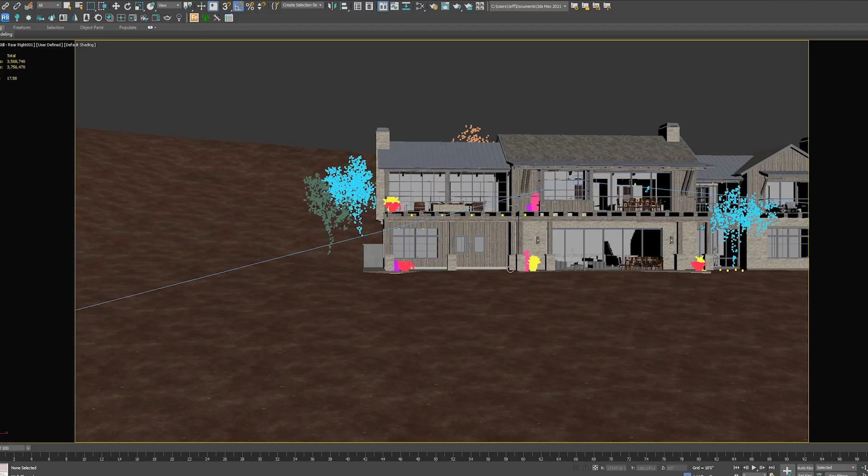It's probably one of the easiest, most basic things you can do that will set you up for success. I've seen so many examples of people who just point the camera straight at the building without any thought to this and think it looks fine. Just do it, get it ingrained, and it'll be second nature.

Number 3, your eye loves contrast. Whatever part of your image has the most contrast, meaning the greatest local difference between a light and a dark, is often the first thing that your eye is drawn to when you look at an image. Don't just take my word for it. Go look critically at a bunch of images on your own. It could be any image, not just architectural photography. Your eye will jump to where there's contrast.

And it's a cool thing to know because you can use this to help make your subject pop and be the first thing that the viewer sees. Whether it's a cool front door, a neat architectural feature, a specimen tree, try to craft your image so that the subject that you want the viewer to be drawn to has some good contrast to it. If you put that high contrast point according to the rule of thirds, you're crushing it.

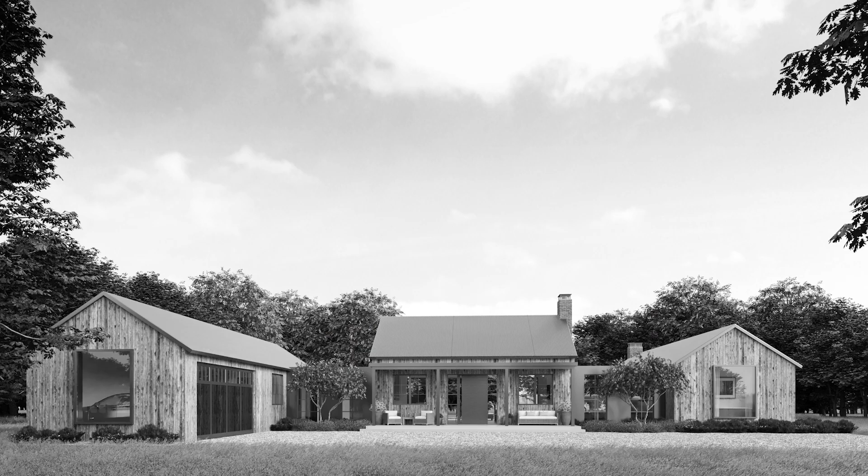Number 4, warm colors will pop relative to cool colors. By warm, I mean yellows, reds, and oranges versus cooler colors like blues and purples. Placing these colors next to each other adds a subtle bit of depth to the image. You see this all the time with night renderings when the warm interior lights really pop and add a lot of drama compared to a blue night sky. More commonly, everyone has seen this exact same principle applied to movie posters using the orange and blue. Go Google it. Totally same logic, and once again, you might not unsee this one either.

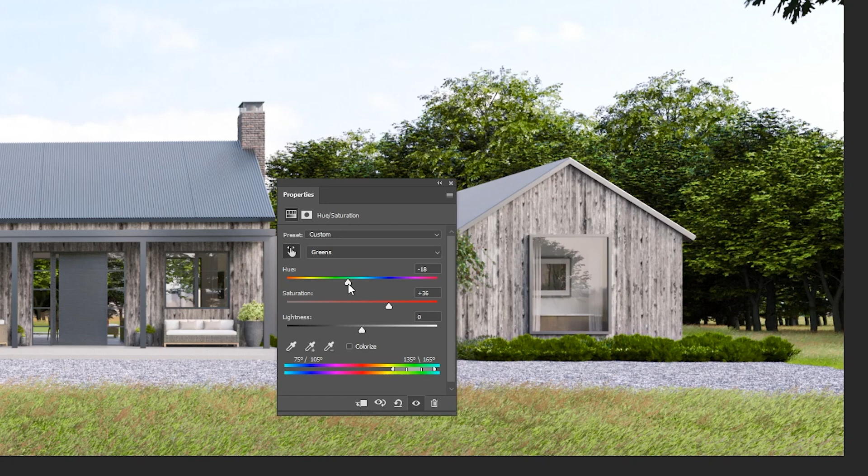But honestly though, color theory is a pretty deep and fascinating topic, but for our purposes, we can keep it simple. If you have some grass in the foreground, just tweak the hue a little bit to be a little warmer of a green, and it'll pop in the foreground compared to a blue sky in the background. You can have warm greens and cool greens, so be cognizant of what you're doing and get creative.

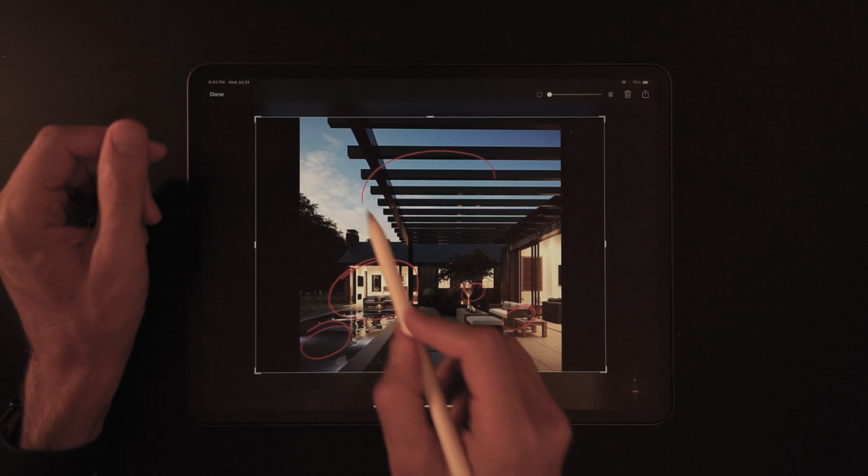Number 5, hierarchy. You want there to be layers to your images so that your viewer's eye moves around in some semi-structured way. You should always have a focal point, which is the main subject, but then you want to have a few other things in your image that your viewer's eye can move around to that isn't as dominant as the main subject. This could be a light and lacy specimen tree or some mountains in the background.

They can all be arranged so that the viewer has multiple things to look at, and they should be composed so that they aren't competing with each other. There are a ton of techniques you can use to achieve this, such as color, size, contrast, and leading lines, which actually leads us to our next point. Number 6, leading lines.

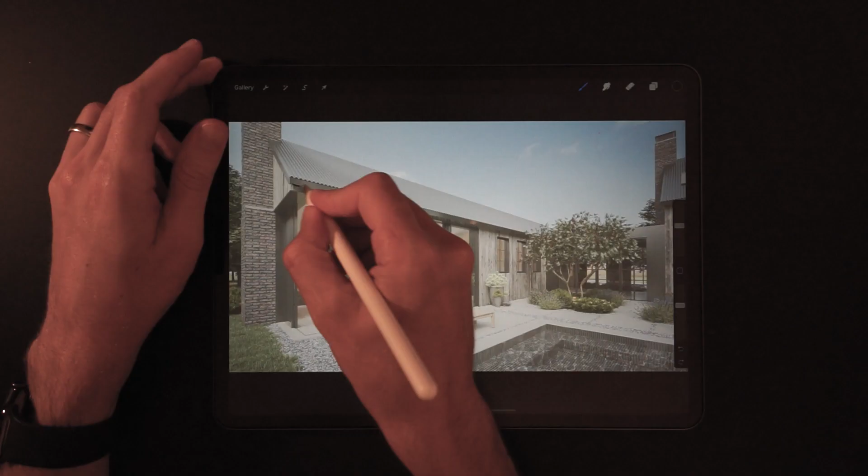You can use elements in your image to help nudge your viewer's eye around in a particular way. The perspective lines in an image often aid in this, as they can often create a natural sense of movement just by the way that the building lines move across the composition.

Maybe you have a small footpath in the foreground that leads toward your front door. The horizontal silhouette of a mountain range might draw the viewer across the image. Again, it's completely up to you how you accomplish this, but it's a cool, subtle way to try to guide your viewer around the image.

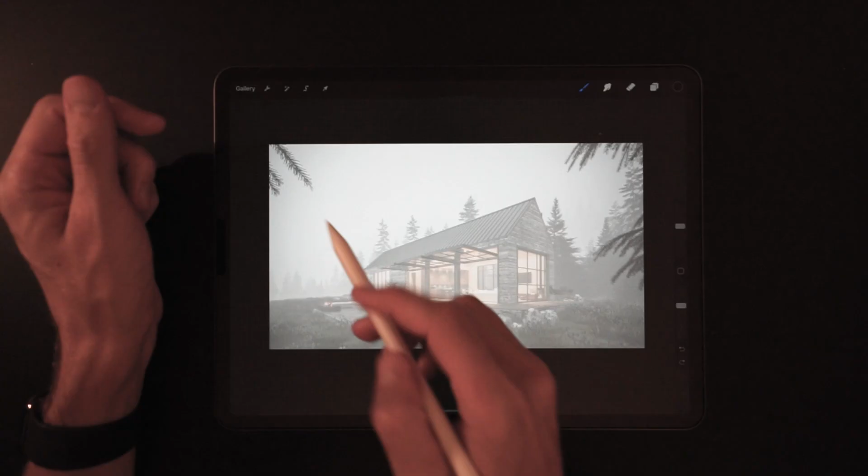Number 7, foreground and background. Similar to hierarchy, you might want to consider putting objects in front of and behind your building. A lot of the time you'll often get a branch or something hanging into the shot, and that helps ground the image and create a bit of placemaking.

Filling out the background with trees, mountains, other buildings, etc., in conjunction with something in the foreground can add a lot of depth and richness if done properly. Which also leads us to number 8. Things in the distance always fade out a little bit. I don't know the exact science behind it, but as you look at objects in the distance, you'll notice they always have a lightened or faded look to them.

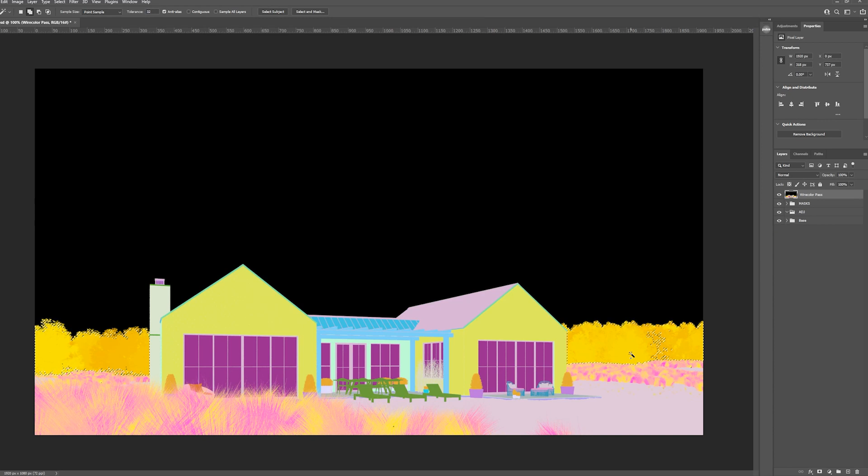It's the type of thing you can easily pull off for your backgrounds in Photoshop with the lightness slider and a hue adjustment layer. Using your wirecolor passes, just mask out whatever you want to look farther back and just pump up the lightness a bit. It can be a really easy and subtle way to just separate your building from the background.

Number 9 is case studies. Don't import your model and just start setting cameras and materials and stuff up. Take the time to compile a list of images from your favorite render artists that you or your client really like and use them to help inform your image. And I promise, if you synthesize a handful of different techniques from a few different sources and apply them to your unique design, you'll end up with something totally unique to you.

Number 10, be critical. At the end of the day, a rendering is CGI. It's a fake image. Start training yourself to look for things that stand out and pull attention away from your building. To this day, whenever I do test renders, I'm constantly scanning the image for things that just look like shit and adjust. The type of things you look for might depend on how photorealistic you're trying to be.

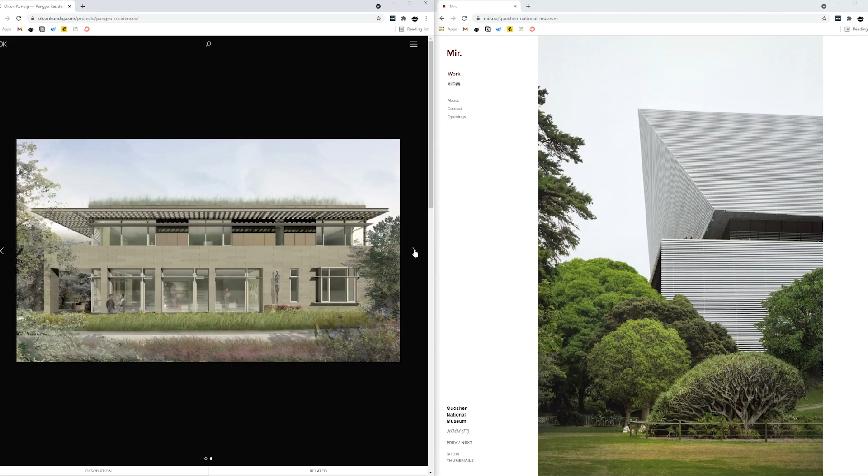Essentially, the more photorealistic you go for, the more you have to worry about stupid little things that aren't actually related to the design, like adding a little dirt or leaves to a walkway. I personally try to find a balance where it's convincing enough that a client or someone will think it's photorealistic, but someone versed in renderings might still find all sorts of technical issues wrong with it.

Just be wary of the uncanny valley, which is something looking close to real, but it just feels wrong because there's something off about it, but you just can't totally tell what. Constantly be asking yourself, why does the image look like shit? And try to fix the little things that bother you until you get to a point where no one's going to notice the remaining little things.

Number 11 is to be intentional. Everything that you set up in your scene should be made with an intentional decision. The angle of the road crossing through, a branch hanging in the foreground, the amount of vignette that you start to apply. Start understanding what these things do relative to all the things that we've covered so far, and make sure they're accomplishing what you're intending them to.

Unlike real photography, you have complete creative freedom in the image that you're making. Make sure that you know why you're making every decision that you do. And number 12 is to plan your scene before you get started. I always like to try to plan what I want to do regardless of what I know how to do in the actual program. And then I work my way into figuring out how to accomplish that thing in Max. I don't like to let the software dictate my creative choices.

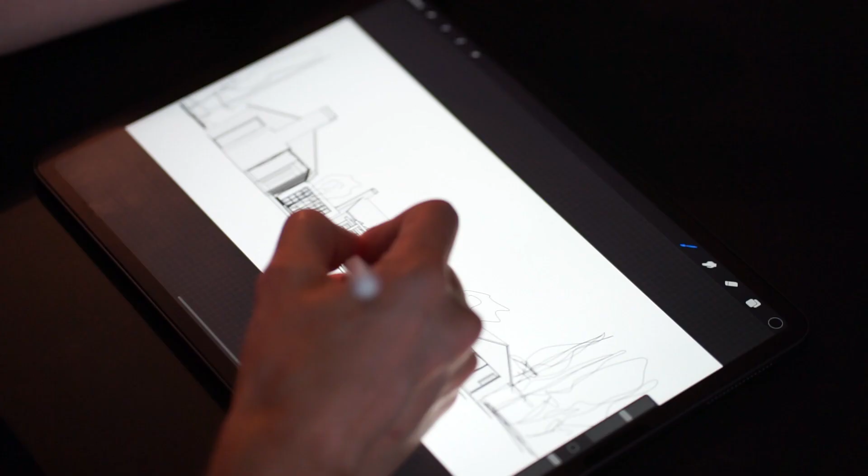A little exercise to try is to sketch out what you're thinking. Consider your subject in the frame, your foreground elements, your background, the sun direction. I know architects tend to be more comfortable sketching, so maybe take 5 minutes to just jot down what you think the final scene should look like, and then go and make it in Max. It might help you stay in control a bit and avoid spinning your wheels on some little tiny settings or something that might not actually be any value to your final composition.

So some of these might seem basic, some might overlap, but I promise if you try to keep all of these in mind while you're developing your technical skills in Max, you're gonna produce much better content. And at the end of the day, these are all just guidelines. You 100% can and should break them and do your own thing when you feel like it. But I do think it's important that you understand why you're doing what you're doing.